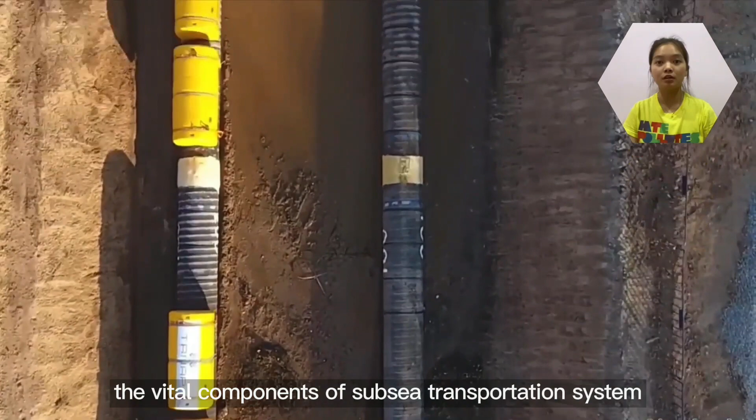We have chosen offshore pipelines as the asset to be studied for decommission as they are the vital components of subsea transportation system to transport common products. According to statistics done in United States, a total number of 982 incidents occurred throughout the year from 2010 to 2020 due to different factors related to pipelines. With that, it is important for us to understand the procedures, regulations, costs and risks involved during the decommission of pipelines.

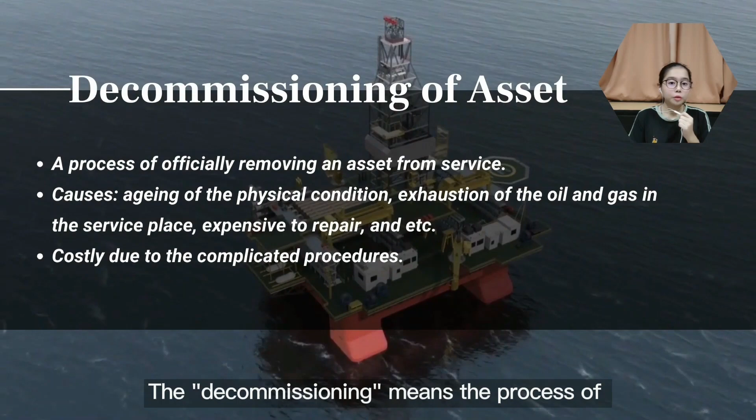Before we move deeper into our topic, let me explain what decommissioning of asset means. Every asset, including pipelines, has its own service life. Decommissioning means the process of officially removing an asset, no matter whether it's tangible or intangible, from service. Some of the reasons to decommission a pipeline are due to the aging of the physical condition, exhaustion of the oil and gas in the service place, and the expensive repair costs. Generally, the decommissioning process is costly due to the complicated procedure to secure the community's health and mitigate the environmental impact.

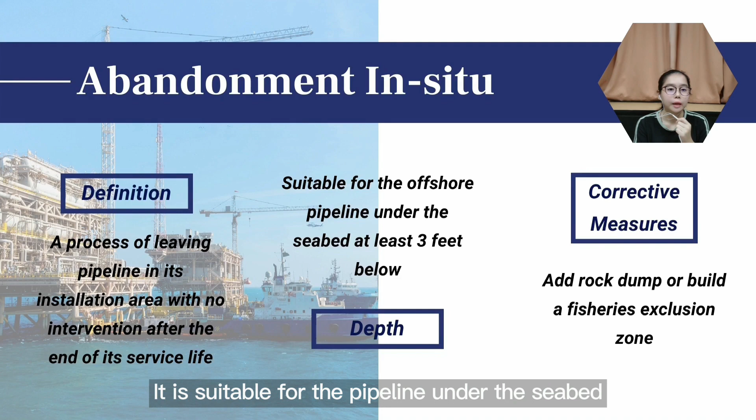Next, the decommissioning procedure of offshore pipelines usually includes abandonment in situ, on-site preservation, and pipeline retrieval. Abandonment in situ or abandonment in place is a process of leaving an inactive pipeline in its installation area with no intervention after the end of its service life. It is suitable for the pipeline under the seabed at least 3 feet below. Some corrective measures have been taken, such as adding a rock dump and building a fishery exclusion area around the pipelines left in place to reduce the risk from fishery interaction.

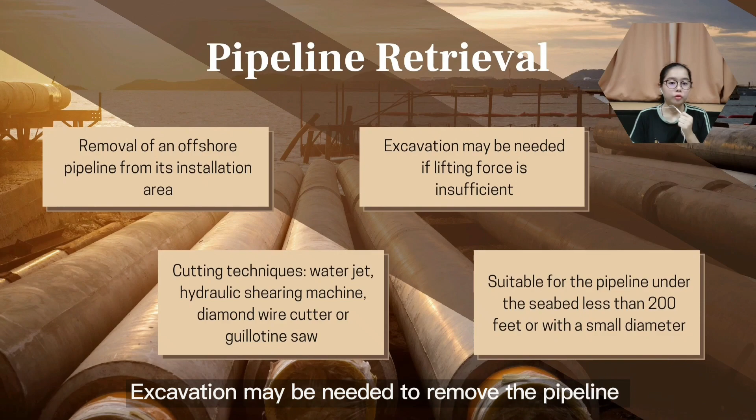For pipeline retrieval, an offshore pipeline is removed from its installation area. It is suitable for the pipeline under the seabed less than 200 feet or with a small diameter. There are different cutting techniques, such as using a water jet, hydraulic shearing machine, diamond wire cutter, or guillotine saw. Excavation may be needed to remove the pipeline if the lifting force is insufficient. Moving on to on-site preservation. It is a process of leaving a pipeline on-site with continual preservation for future reactivation.

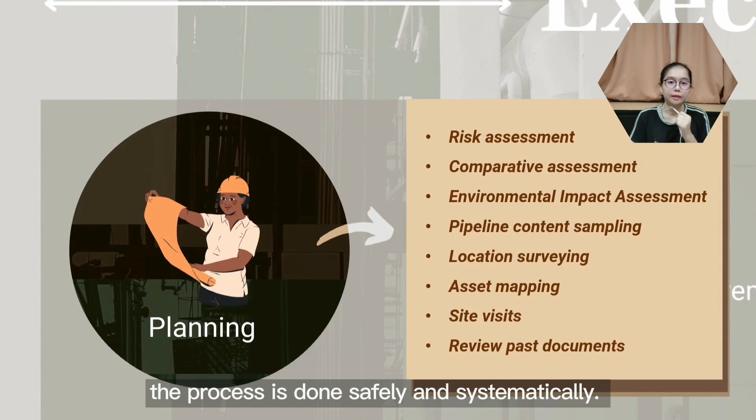Next, I will explain the decommissioning procedures. First of all, advanced planning is essential to ensure the process is done safely and systematically. After that, the pipeline needs to be isolated by physical removals such as air gap or water gap. It also needs to be de-energized from all energy sources. Next, the pipeline needs to be cleaned through the pigging process to remove and recover all fluids according to the waste management plan. The following step is to close the subsea valves on the side tap and remove all appendages such as the valves and subsea assemblies.

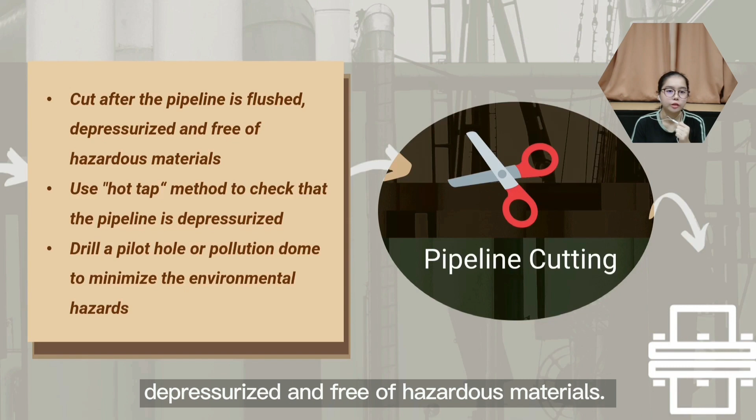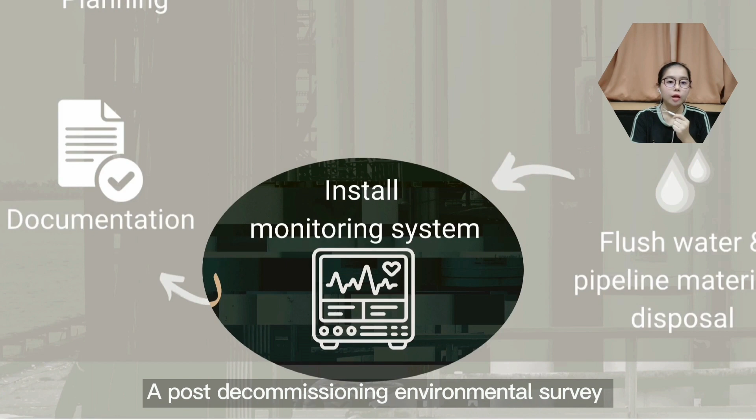For the pipeline left in place, it is recommended to install monitoring equipment or system to assess the long-term behavior of the pipeline. A post-decommissioning environmental survey can also be conducted to monitor the seawater quality at different locations. Lastly, during the decommissioning process, all documents must be recorded for future review purposes.

Moving on, we are looking into regulations imposed for decommissioning of pipelines. Legislation and regulations for decommissioning of pipelines are studied in 4 countries: Malaysia, United Kingdom, Norway, and United States. In Malaysia, there are no specific governing regulations for the offshore decommissioning, and it is only addressed under national legislation. Having the ownership of petroleum resources, Petronas is responsible for upstream facilities decommissioning based on the PDA, Petroleum Development Act 1974.

On the other hand, implementation of the decommissioning plans would have to comply with the following legislation and standards as stated. Firstly, is the Merchant Shipping Ordinance 1952, which ensures the safety and takes control over offshore industry structures, mobile units, and vessels.

The Petroleum Act 1998 in the United Kingdom stipulates that the owner of facilities and pipelines are compulsory to seek authorization from the Secretary of State for their decommissioning plans. Proposal to place associated materials on the seabeds require a license under the Marine and Coastal Access Act 2009 in England and Wales or the Marine (Scotland) Act 2010.

In Norway, disposal of pipelines and cables on the Norwegian continental shelf is covered by White Paper 47. In the United States, the Federal Energy Regulatory Commission (FERC) regulates and controls every aspect of active pipelines, operations, and decommissioning. In this section, I will go through the costs involved in decommissioning a pipeline.

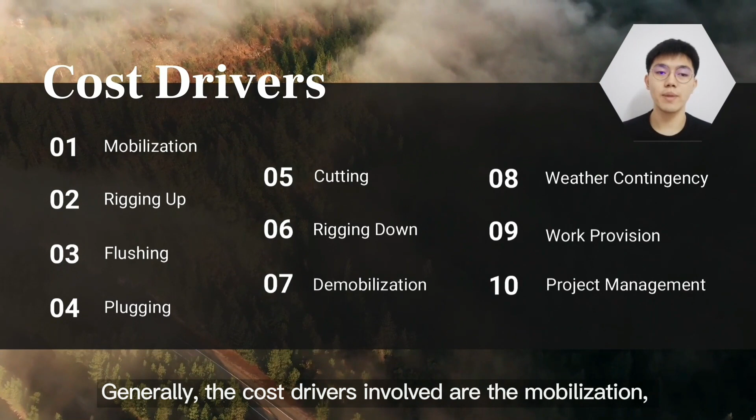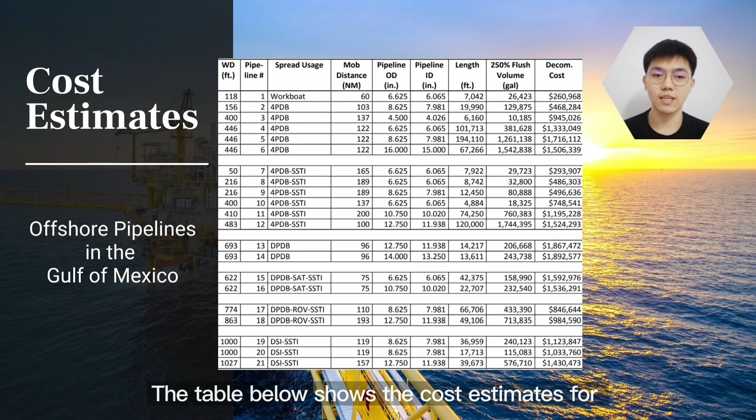Generally, the cost drivers involved are the mobilization, rigging up, flushing, plugging, cutting, rigging down, demobilization, weather contingency, work provision, and the project management. The table below shows the cost estimate for the selected offshore pipeline in the Gulf of Mexico. Now, I will explain the cost factors that influence the decommissioning cost.

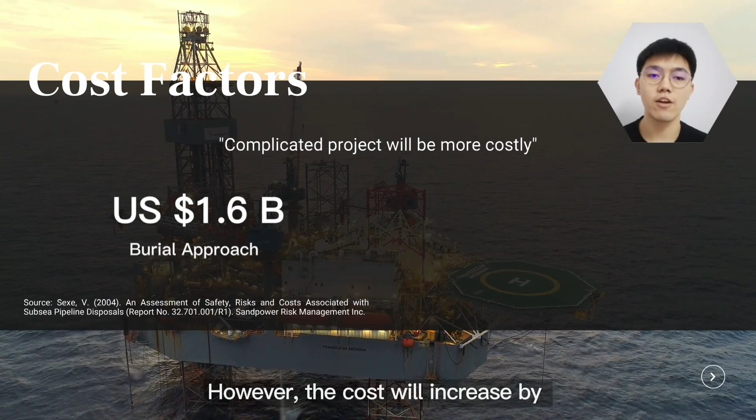First, a complicated project will be more costly because it will take longer to complete the project. For example, the decommissioning of the 32,900 mile pipeline by using the burial approach is expected to cost $1.6 billion. However, the cost will increase by more than 900% if the complicated removal approach is used.

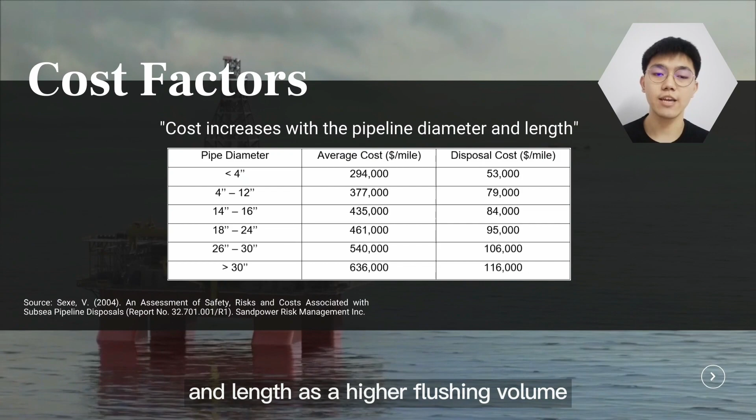Second, the decommissioning cost will increase with the pipeline diameter and length, as a higher flushing volume is required to clean the pipeline. Third, the deeper the pipeline is located below the water, the higher the cost for the mobilization and the diving activity. Fourth, oil lines transporting crude require higher cost than gas lines, as more pig runs and flushing volume is needed.

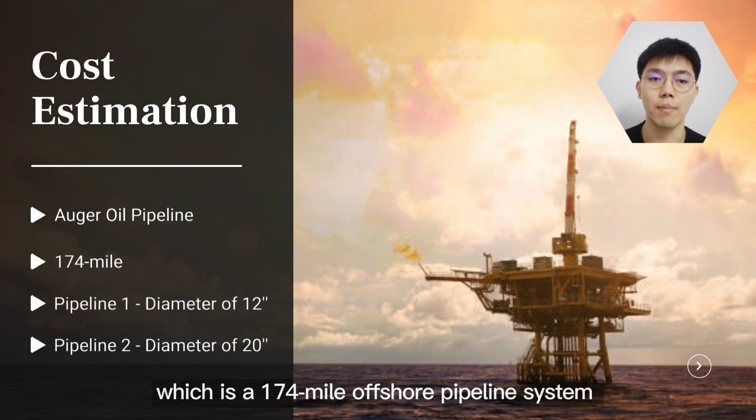Without further ado, I will present the cost estimation for the decommissioning of the Auger oil pipeline, which is a 174-mile offshore pipeline system in the Gulf of Mexico. This pipeline system consists of two pipelines with the diameter of 12-inch and 20-inch respectively.

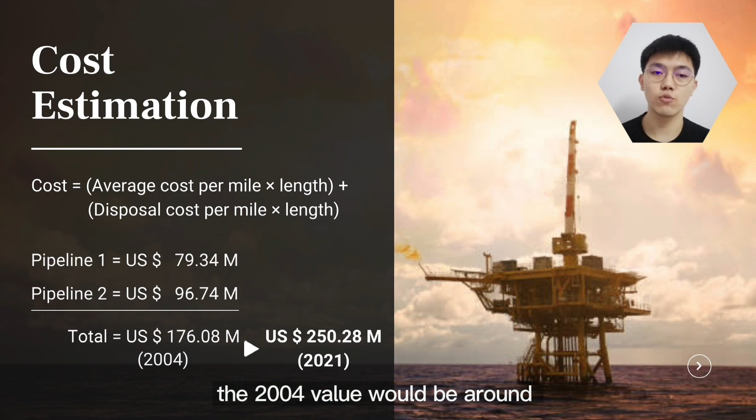So, by using the table shown previously, it's estimated that $176.08 million is required to decommission the pipeline in the year of 2004. Taking the inflation into account, the 2004 value will be around $250.28 million in the year of 2021.

Risk management is an important element during asset disposal. Before we know how to manage the risk, we should know what is risk. Risk is an unplanned event that is possible to take place. There are 4 steps in risk management, and these 4 steps are all applicable to manage risk during offshore pipeline decommissioning. Step 1, risk identification.

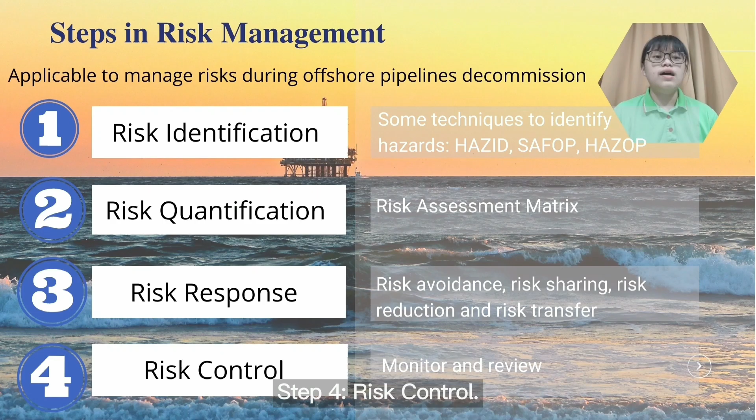Step 2, risk quantification. Step 3, risk response, which includes risk avoidance, risk sharing, risk reduction, and risk transfer. Step 4, risk control. Now let's see some possible risks during offshore pipeline decommissioning. First, personnel hazards. Some examples are struck by moving equipment and caught between moving joints of pipes. To reduce this type of risk, one should wear personal protection equipment (PPE) and always be alert of the risk.

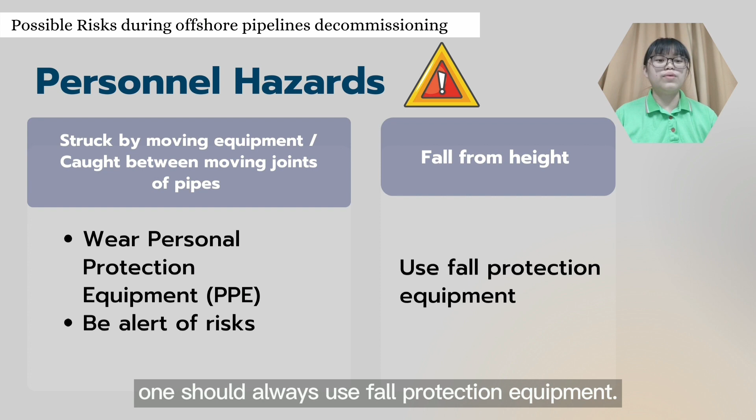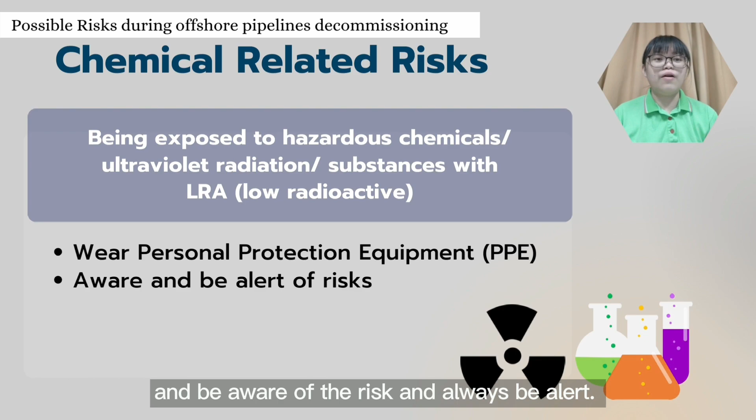The next example is fall from height. To reduce this kind of risk, one should always use fall protection equipment. The next risk is chemical risk. Chemical risks include exposure to hazardous chemicals, ultraviolet radiation, and substances with low radioactivity. To minimize this type of risk, one should always wear personal protection equipment (PPE), be aware of the risk and always be alert.

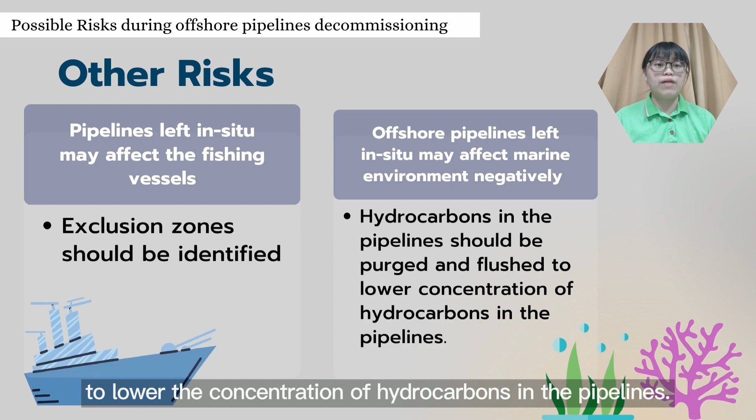Other risks are related to pipelines that are left in situ for decommissioning. This pipeline may affect fishing vessels. To minimize the risk, exclusion zones should be identified. Other than that, these pipelines may affect the marine environment negatively. To minimize this risk, hydrocarbons in the pipeline should be purged and flushed to lower the concentration of hydrocarbons in the pipeline. That's all for the risk management part.